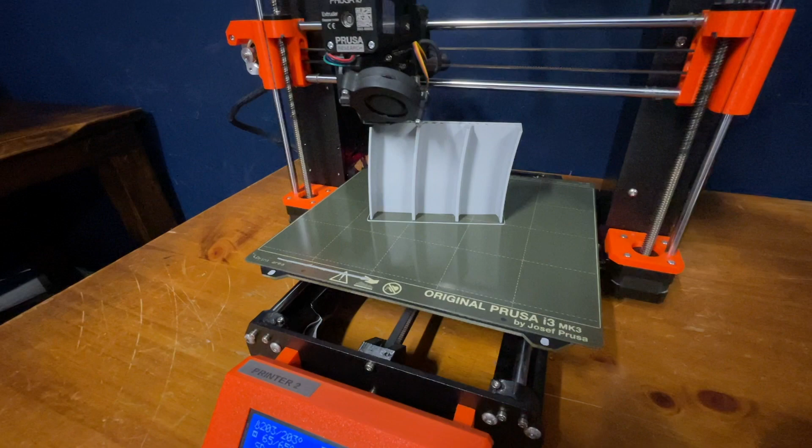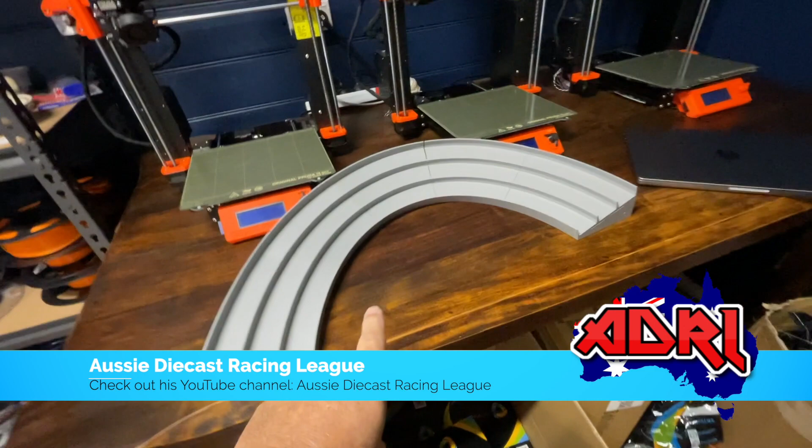I thought I might take you on this journey of the build of the 3-lane Hot Wheels 180 curve that I'm designing for Aussie Diecast Racing League, Macey. Here we are overnight, we've printed out 5 sections and there's actually 6 sections in total, so let's have a look. There's the first 5, 1, 2, 3, 4, 5, and we've got another section that's just going to go into here, and that is it here. That's that section there being printed, and that still has almost 5 hours, and that's been going for 5.5.

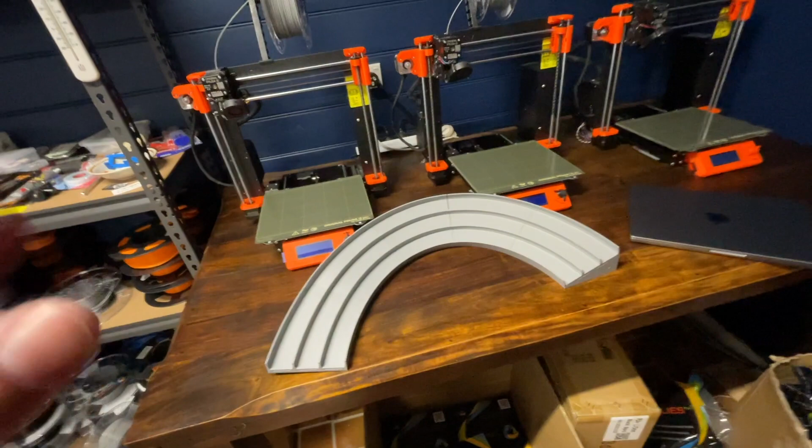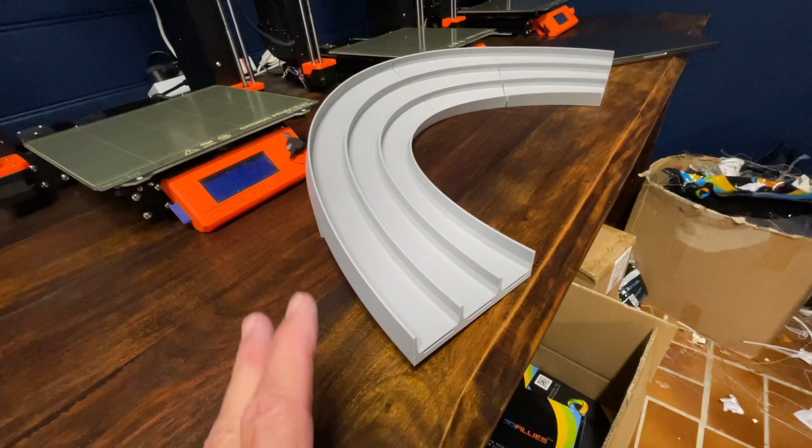But it's not without problems. Every time I've designed something, there's always a problem, and it does take a long time from design to getting to this point. Overall, it's a beautiful looking piece. I don't know if you're excited about 3D printing like I am, but to me it's a work of art. It really is. It's the design and the way the machines can print and the way it just comes out. It is beautiful, and its operation to me is just first class when you race cars.

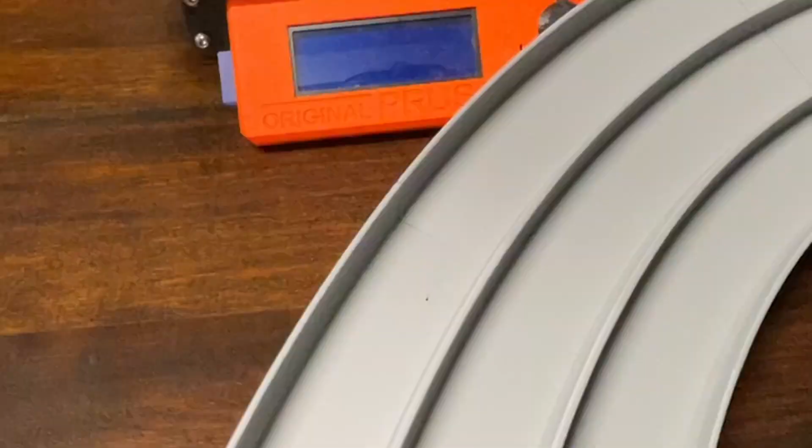But yes, there is a problem with this part of this 180. It's not these sections, these are printed out beautifully, but you can see here there's a little mark, let me just zoom in there with this lens. You can see there, it looks like a little black mark or something. It's not actually.

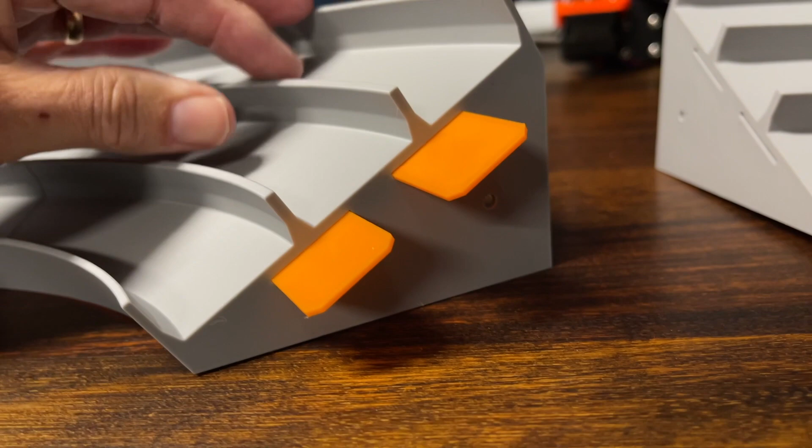What it is, I haven't quite designed it correctly where these joiners - see these holes? These are really tricky to get right because of the angle of the track. The angles obviously change as it goes upwards. So to design these slots, you have to really be pinpoint accurate. Otherwise they will poke through the top and or the bottom. And in our case, this is exactly what's happened. So I will need to now go back into Fusion 360 and redesign these connector holes and then do another print.

Unfortunately that affects this part and that part. So these will need to be redesigned and printed, and I'll end up keeping this for myself because I don't mind having a little mark here. So out of this I've scored myself a 3-lane track, a 3-lane curve. So let's head into Fusion 360 and see exactly what this problem is and how we can rectify it.

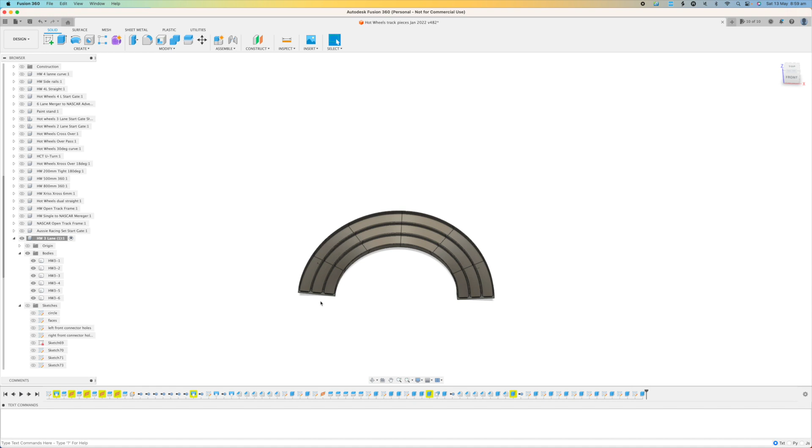And here we are in Fusion 360, and you can see where my mouse is, there's a little mark. You may not be able to see it, it's very hard to pick up sometimes, and sometimes you have to zoom right in. But there's a little mark which I didn't pick up on when I completed this design. So we'll just strip it back to that part.

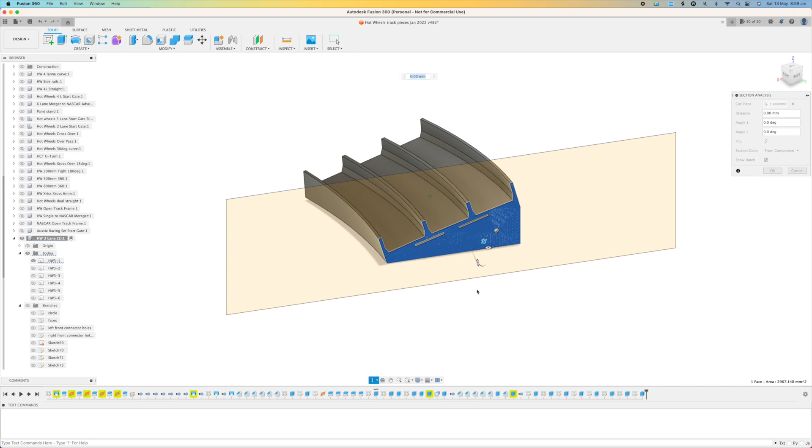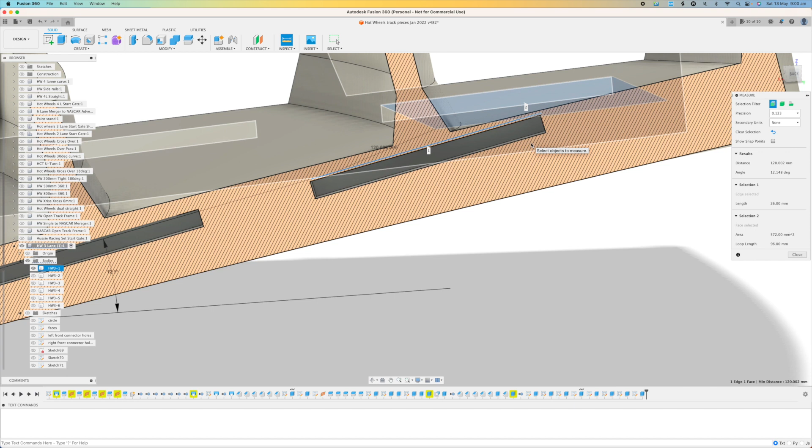And what we're going to do is zoom in, and we'll do a section analysis on this. This is the great thing about Fusion 360, you can actually get in there and really pinpoint the issue. So we'll just get this set up and we push it back. And you can see the right hand side connector hole, you can see how it's really close to that very lane 3 on the outside, and that's the culprit. That's what's causing that mark. It's the layers poking through, and what we're looking at here is the very end of the connector hole.

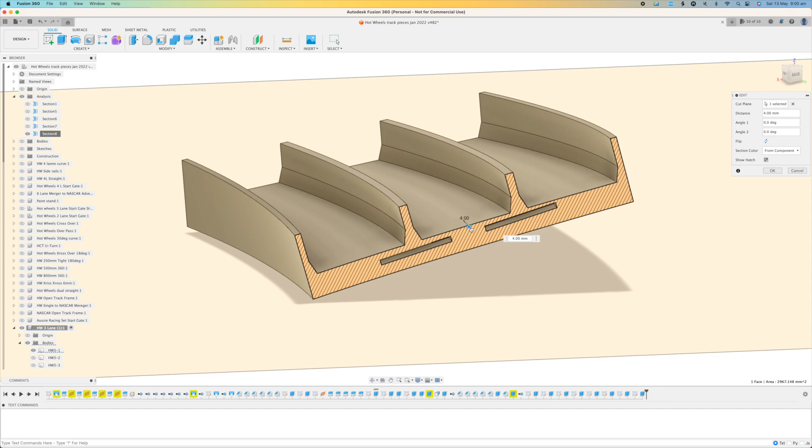So what we need to do is just go back in and get rid of that sketch, redesign that sketch, and away we go, and then reprint, and hopefully we've got it. You can see the angles change as you go up, and look, I actually stuffed up here with my sketch, and we'll just get into the sketch and I'll show you that. It's just down here, and I should have picked up on this, but I was probably too quick in wanting to get this onto the printer. Let me just zoom in.

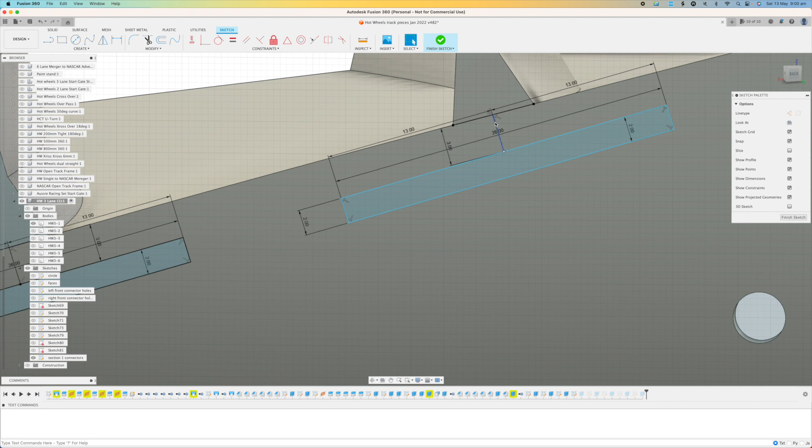And so there's the sketch, and you can actually see that line. You can see it's not squared. I stuffed up, very easy to do. While Fusion 360 is great, sometimes when you're moving too fast and you think it's squared, it's not. So we'll just delete everything here, and we'll just readjust it all, and then re-extrude everything.

And put it back onto the print bed, and hopefully in the next 24 hours this piece and the next piece will be completed, and we'll have a sensational looking 3-lane 180 that connects to Hot Wheels track. So I'll finish this off and we'll get back to you.

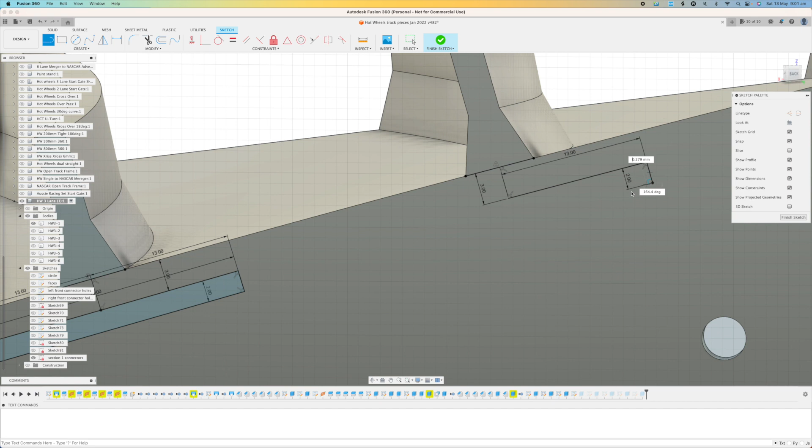Yeah, look, it's not always easy designing 3D printed parts. It's a lot of trial and error, and it does cost a lot, both in time, electricity, and also reels of PLA. So this particular part here might go through 1 or 2 of these, just to get it to the point where it's saleable. So these things can take up to a week or 2 weeks just to get right, in particular with 10.5-hour prints on each part, and there's 6 parts to this particular track. So anyway, the next video will be the completion, and I'll have that up in the next 24 hours.